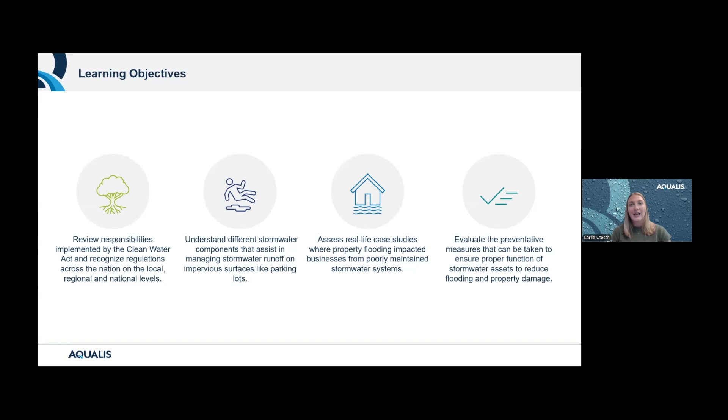So I have a few learning objectives for us today. We will review some responsibilities implemented by the Clean Water Act and recognize regulations across the nation on the local, regional, and national levels. We will understand the different stormwater components that assist in managing stormwater runoff. We will assess some case studies where poorly maintained stormwater systems ended up impacting businesses. And finally, we will evaluate preventative measures that can be taken to ensure proper function of stormwater assets that reduce flooding and property damage.

To get started, in our first section we'll talk about the foundation for the presentation, which is why stormwater management is so important. In this illustration, we have your average retail commercial parking lot. If you follow the yellow lines, that would be the natural flow of water. So as it rains, runoff drains across the lot into, thankfully, a storm grate.

We have a stormwater system on this property, and the catch basin is ultimately connected to a retention pond that then pushes out water to, let's say, this is a bay or a lake we have here. So the pesticides, sediment, oils, and trash all flow with the water.

They're going into the catch basin and then the pond, and the pond is meant to capture those. So the pond slowly deposits the stormwater into our lake here, which is why we need the pond to mitigate those pollutants and all the extra runoff within it.

So without the stormwater system, rain carries pollution into the lake directly. The water is moved across the impervious surfaces that we have within our urban development. So maintaining and managing stormwater runoff is an extreme concern because of the concentrated amount of impervious surfaces in all of our developed infrastructure. With more impervious surfaces, which are just surfaces that don't allow water to penetrate, that means larger amounts of runoff need to be either redirected or treated.

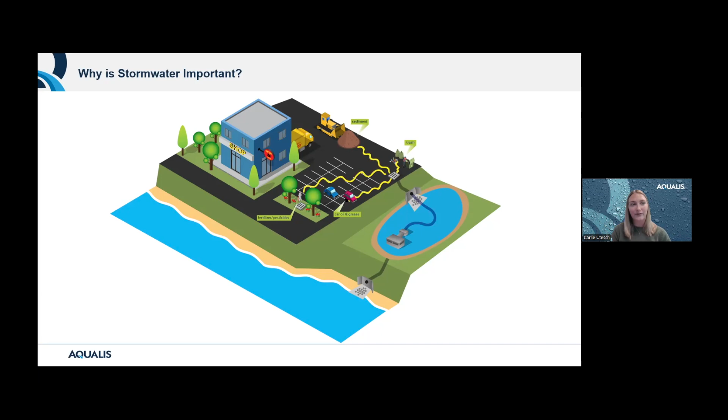So for our purposes today, I'm going to use these terms interchangeably: a best management practice, or BMP, and a stormwater control measure, or SCM.

These are treatment measures, techniques, or structural controls to assist in managing stormwater. They manage the quantity and quality of that runoff. Some are intended to do quantity more than quality, or vice versa. But ultimately, we often use these in tandem - multiple stormwater control measures on one site to manage that runoff. I'll refer to it as a treatment train in a couple slides as well. So we will also dive into what those assets are.

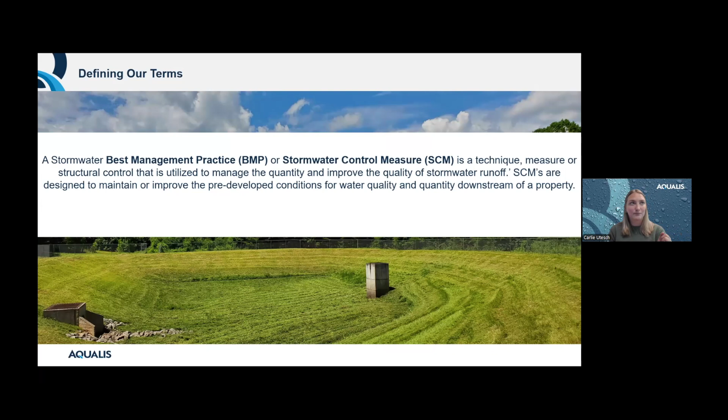We have bioretention or rain gardens, sand filters, constructed wetlands, wet or dry detention basins, retention and detention ponds, and grass swales. All of these systems work together, ultimately in a treatment train, following one to another all the way through to treat, maintain, and manage stormwater runoff.

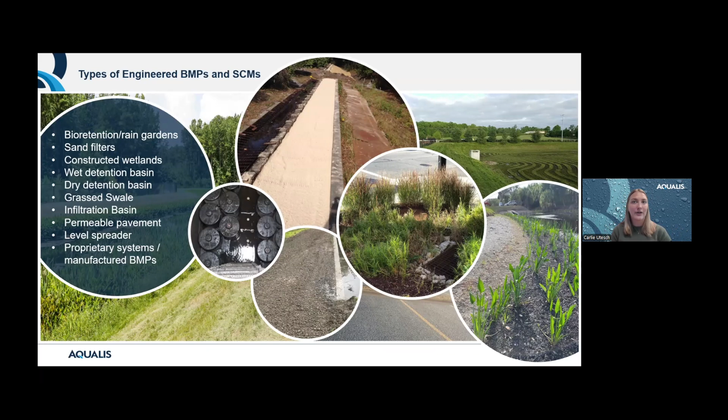So let's talk about the regulations in place. At the federal level, we have the EPA and the Clean Water Act. These regulations are overarching on the federal level, and beneath that we have the state and local regulations.

The National Pollutant Discharge Elimination System, or NPDES permit. I had a colleague call it a NPDES permit, and I thought that was really fun. You may be familiar with that. And then also an MS4 permit, or the municipal separate storm sewer system permit.

These regulations work together to implement local stormwater programs and ultimately compel local property owners and facility managers to maintain properly functioning stormwater systems. State and local regulations vary widely across the country, but these variations in local compliance are important and relevant to the area they are implemented in. A lot of multi-site property owners have some difficulty managing stormwater, but it's important to do so anyway.

Now that we've talked about the regulations, let's talk about how stormwater control measures can help property owners comply with them. Stormwater control measures are designed to control water quality as well as water quantity of post-construction stormwater runoff. That is primarily what I'll be talking about today, not necessarily during active construction. But there are regulations that stormwater control measures are implemented to comply with.

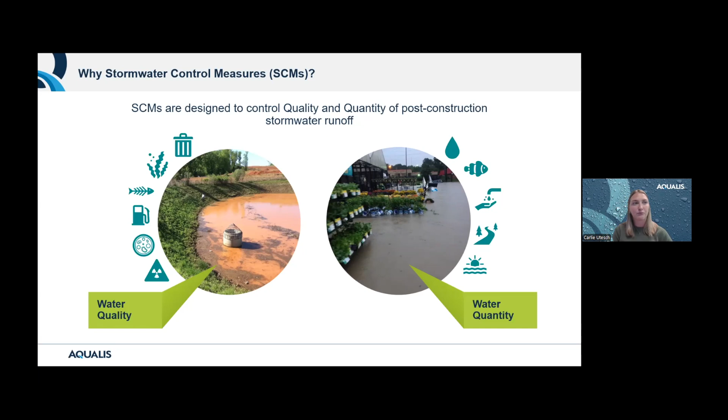Going into more detail about the importance of water quality, in many areas across the country, stormwater flows directly into lakes and streams without treatment, meaning anything it collects along the way could end up in our waters.

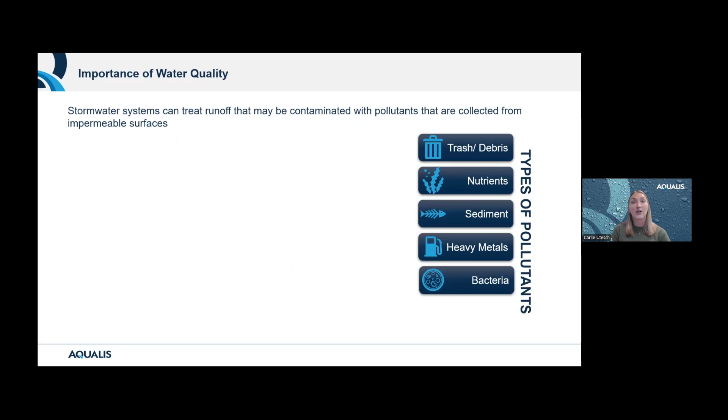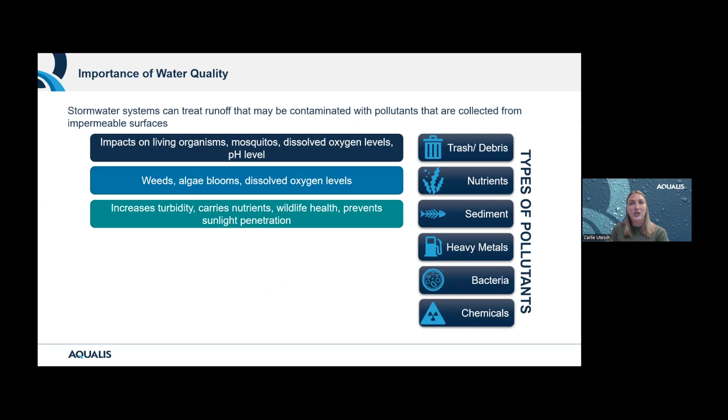Here are some common pollutants. Many of these harm our natural ecosystem either by blocking sunlight, impacting dissolved oxygen levels, introducing toxins, or changing the pH. These pollutants can be found everywhere in our daily lives, from trash on the side of the road, pesticides or fertilizers, unstabilized dirt, leaking gas tanks, animal waste, sewage, or paints and detergents.

Untreated runoff will collect all of these. So stormwater control measures are put in place to stop pollutants before they reach streams. We actually had an instance where a detention pond was very white, which of course is not normal. Upon further investigation, there was painting occurring across the street, and then it rained and the paint was pushed into the pond. So while that's alarming and something to keep an eye on, that's the point of the pond, right? It's to collect that paint before it goes somewhere else. So it's definitely something to be very aware of.

Oops, sorry, I forgot this last bullet point, the toxic chemicals.

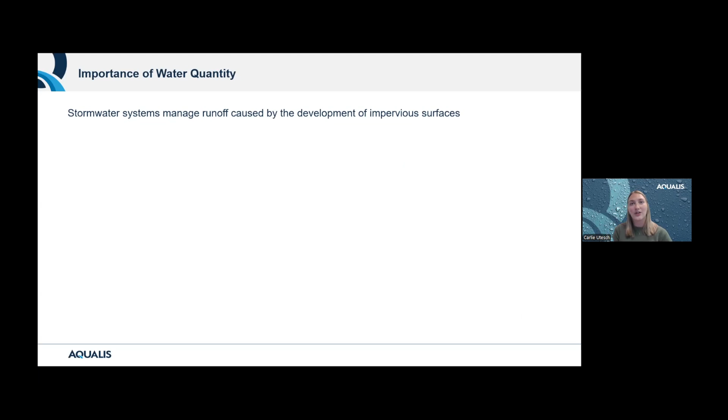Okay, moving on, let's talk about water quantity. Today, this is our main focus. When we think of water quantity, we think of flooding, but there's more than just flooding. The impacts really do span much greater than that. Flood prevention is our main objective for today.

Stormwater assets help mitigate flooding in parking lots, private and public property, including roadways. This flooding impacts the quality of water as well as the quantity, as we just mentioned. When systems flood, they don't function as designed, increasing the risk of contaminated water as the system isn't flowing, filtering, or treating the water properly.

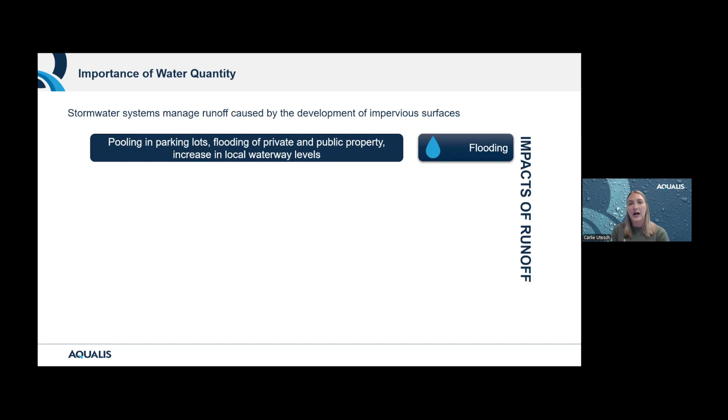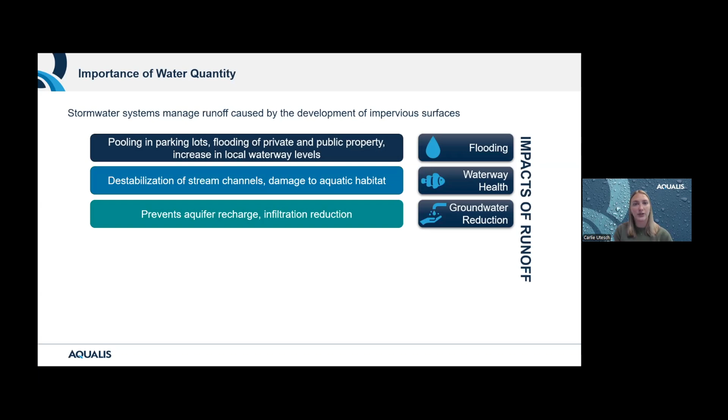Also, waterway health: flooding impacts waterway health with the destabilization of stream channels that ultimately damages aquatic habitats. Groundwater reduction: large amounts of runoff prevent groundwater recharge, which is the natural infiltration of water into the soil. This recharge assists by slowly moving water into the water table, which naturally removes pollutants. That's important as well. Erosion, soil destabilization, which can lead to major public safety issues and also impact stream banks.

Sewer overflows. This is a common occurrence during flooding when backup pumps or systems fail to handle the amount of water, which will lead to untreated wastewater reaching local rivers and lakes that can make people and organisms sick. So all of these impacts can be mitigated with proper stormwater management.

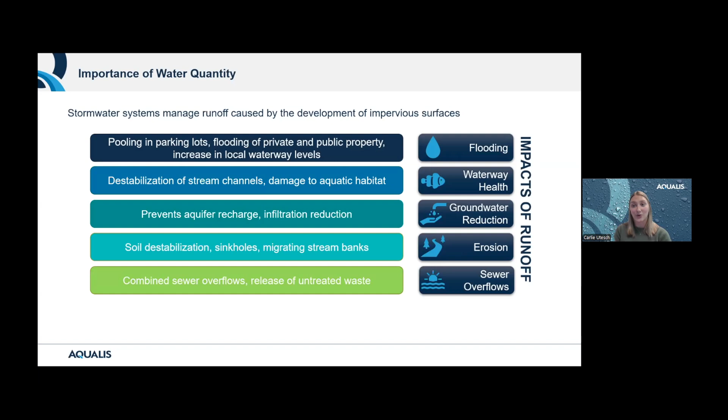All right, we've established the why when it comes to managing stormwater, but what are the responsibilities of property owners or those that assist owners with managing properties? So there are two major facets about property owner responsibilities we'll talk about today. Inspections on one side, and then the other is the operation and maintenance agreements, operation and maintenance plans.

So inspections, this can include a notice of termination or pre-occupancy inspection. That's really on the pre-construction side. So they take place during construction of a property before the operation of the site, before the ownership is transferred. So any maintenance or repair needs are documented for the general contractor to perform before the property owner becomes responsible.

Moving on, annual inspections ensure that a stormwater system continues to function as designed and is in compliance with federal, state, and local regulations. So every facet of the system is inspected and examined, and then an action plan can be developed for any system that has been improperly maintained or requires some restorative repairs. So an annual inspection, the report is typically submitted to your local municipality. It may require certification by a stormwater professional or a professional engineer.

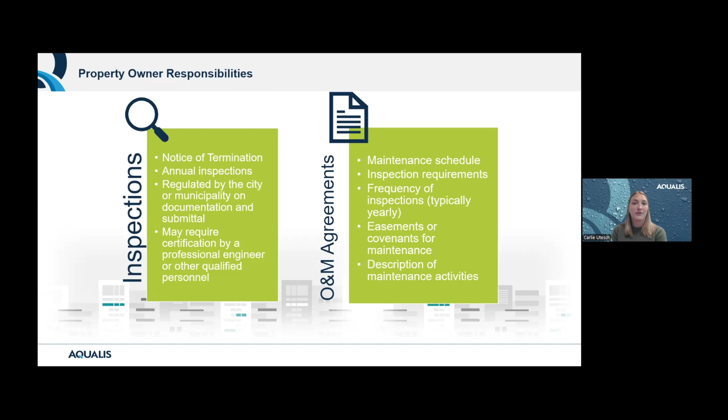And if not, AQUALIS is here to assist in implementing the document as well as creating one in the first place, establishing that maintenance plan that works best for the site, keeping in mind the budget and the system needs. So if your property is not maintained or inspected, you can be at risk of being issued a notice of violation. So what is a notice of violation?

It's an official notification to inform a non-compliant property owner or manager of a violation in relation to improper stormwater management. So when regulations or the operation and maintenance agreements are not followed, the notice of violation, which is called different things in different places, sometimes corrective action, corrective notice, is issued to the property owner. So this document includes where the issue was found and also ideally how to fix it.

But more than just the fine behind this violation, the importance is protecting the watershed, right? So regulatory bodies don't ever issue fines just to issue fines. There's always a reason. There's always some environmental expectations that are the root behind the violation.

So it's really important to communicate with the municipality if you're issued one of these, and most often they're very agreeable people. I know a lot of you are on the call today, and AQUALIS is here to work with the municipalities as well as property owners, really facilitating that relationship and making sure that our environment is protected in the end. So those regulations are really in place to ensure your system is working correctly, meaning it's capturing pollutants and reducing excess runoff.

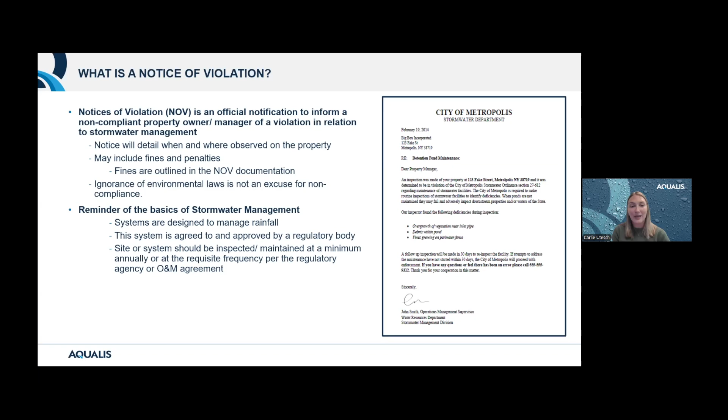So there's two different types, the during construction and after construction. Quickly going over during construction, there's a couple different factors and instances that may warrant a violation. The standards for construction practices are very different because there's a high risk of pollution with unstabilized dirt and other potential vulnerabilities. So potentially if the developer fails to apply for a proper permit or doesn't implement a stormwater pollution prevention plan, or potentially there's an exceedance of permit effluent limits. So those are all ways that you may be issued one.

But then after construction or post-construction violations can also be issued for similar reasons. So failure to implement an appropriate stormwater control measure, failure to maintain or repair those stormwater control measures are also a very frequent reason we see, especially when your operation and maintenance agreement outlines the expectations and then those aren't followed. That's a big deal.

Anytime water is pooling or flooding on the property, that's another red flag for many inspectors. So there are a few easy ways to identify that a system hasn't been maintained, but the inspections are in place to ensure that the system is properly maintained. Some other reasons could be illegal dumping, discharge and illicit connections.

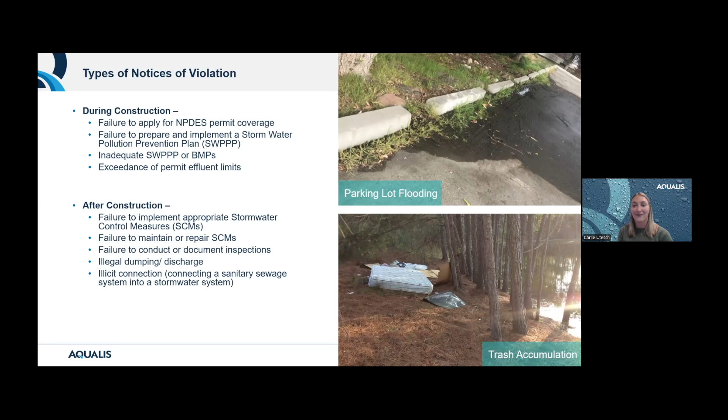But let's move on. Now that we understand the responsibilities, let's talk about how we can avoid those notice of violations. Specifically, how can we mitigate flooding utilizing stormwater control measures, what preventative maintenance protocols should be applied, and what deficiencies can end up causing flooding. So we'll review a few common stormwater control measures you may find on any given property or parking lot, why they fail, and how to avoid that.

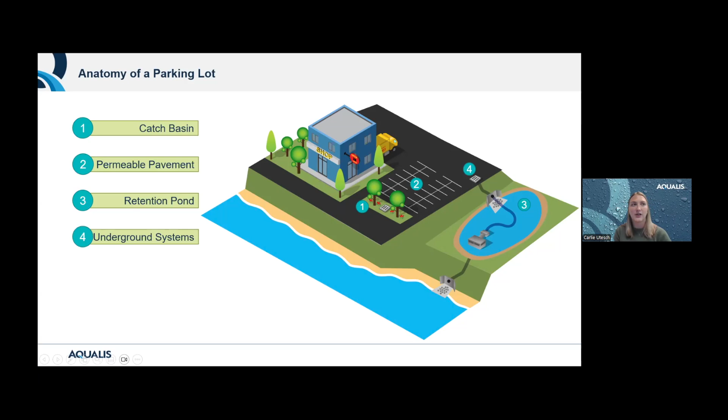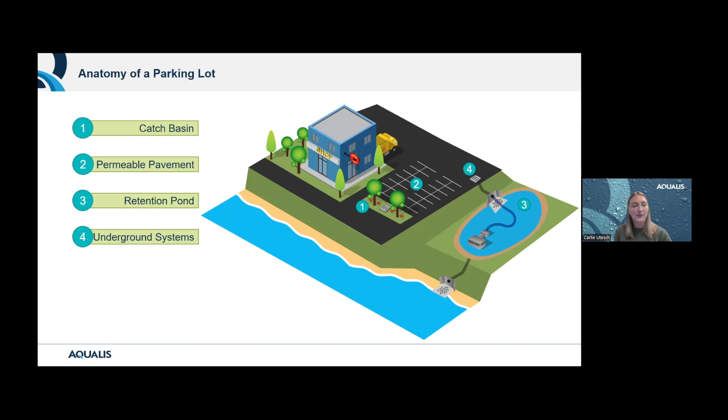But then also let's talk about underground systems. So these can vary. Some may just be a large vault as an alternative to a retention pond, but some also offer water quality benefits. So all of these systems work in harmony together to ensure proper mitigation of stormwater quantity and, of course, water quality. There are, of course, multiple other ones, but this is just what we have time for today.

So let's talk about catch basins. You may also call them storm drains. They are a common stormwater asset designed to collect the runoff from non-permeable surfaces. So that's, again, just any surface water cannot flow through. Catch basins are a very effective stormwater solution. They come in multiple designs, including drop inlets. That's the second photo from the bottom left, or a curb inlet, which is the middle photo. Catch basin is the second photo from the right. These systems take the flow of water underground through pipes and eventually to a pond or water body.

Naturally, sediment and debris settle in the bottom of the catch basin, which eventually can, of course, cause backups and flooding as the drainage capacity is reduced. So that's something to absolutely be aware of. Catch basins are usually found in parking lots and roadways. Normal wear and tear is expected because they are in the activity of it all. Large trucks and vehicles are also usually driving over them, or maybe even parking on them, which can cause them to settle and sink, like you see in the second picture.

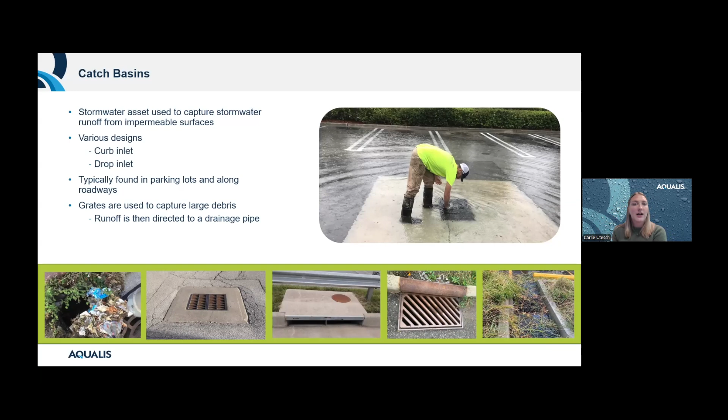In this picture specifically, you can also see cracks around the area, the two different squares around the drain. So that is a previous repair. So as you're kind of moving through, definitely something to be aware of. Those excessive loads will absolutely cause settling. But let's talk about some other common deficiencies. So, like I said, settling, that's essentially the brick and mortar deterioration. So inside or around the mortar of the basin is concrete, sometimes it's bricks. Those will eventually fail, which of course will release some debris downstream, but also leave an opening for stormwater to bypass through the grate, which unfortunately will lead to sinkholes as well.

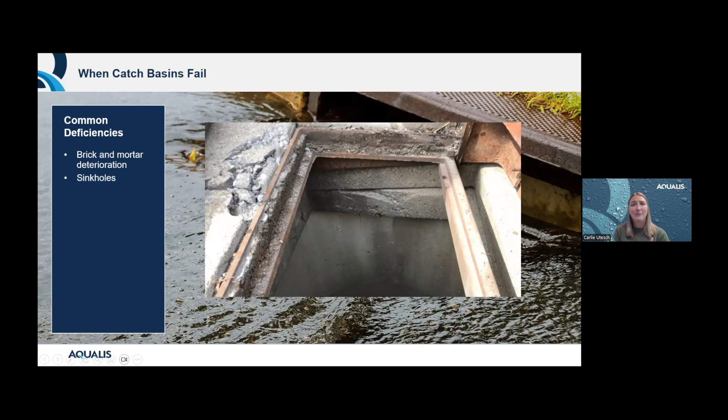Sediment buildup: as we talked about earlier, sediment collects in the bottom of the catch basin. So debris like leaves, trash, gravel, mulch, that will all collect in there and then eventually build up. That will lead to blockages and backups. Ground separation and cracking around the catch basin is a visual symptom that you can see from above ground, but it's always indicative of something larger happening underground as well.

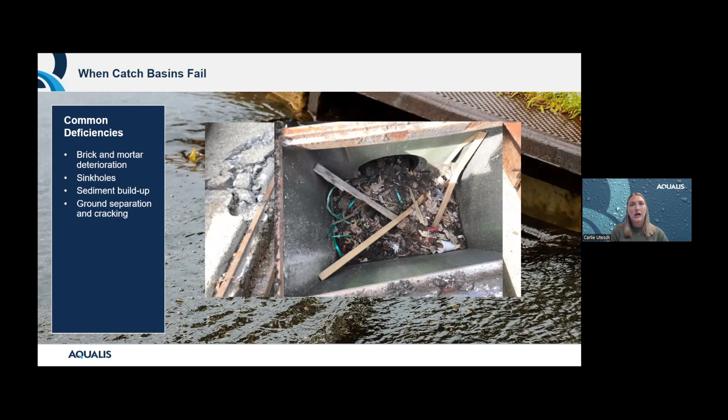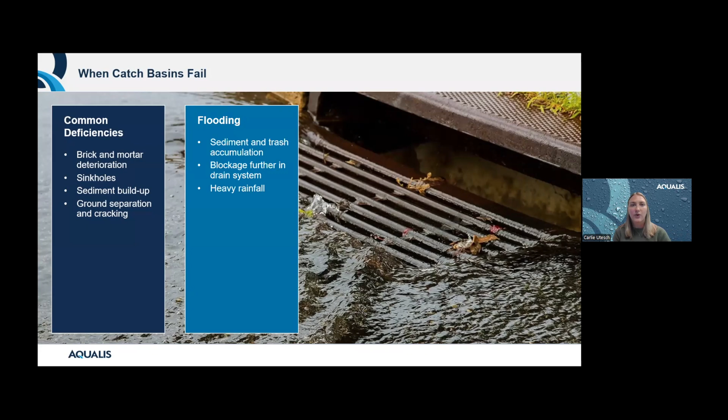Moving on to flooding, there's really nothing worse than flooding caused by trash accumulation, because that is the first step when dealing with catch basins. So thinking back to our illustration, if there's a blockage, crack, or issue with the underground pipe, that water could flood back up the catch basin, which we don't want. Heavy rainfall, so simply an overwhelming amount of rain, will cause pooling, but if water's not drawn down quickly enough, that's when you have an issue.

Okay, so how do we prevent all of this? With regular maintenance, of course. Simple visual inspections are a good place to start. Just identifying pooling or ground separation when it's minimal can save you thousands of dollars in repair if a sinkhole opens up or your building floods. So during stormwater inspections and maintenance visits, the stormwater professional will be opening the grate to clear out debris, but also taking inventory of the structure to identify potential failures before they lead to those sinkholes.

Professional stormwater inspection will also include sediment measurement, so understanding how much debris is built up. For example, once sediment accumulates more than a couple inches, depending on your property, it may be time to clear that out. Same with trash and debris. So the whole point of the catch basin is to catch this before it flows downstream. So it's good that it's accumulating, but also you can't let it build up.

So a professional preventative maintenance visit is also going to include documentation. That way there's a paper trail of maintaining the asset, and your municipality can have proof that you've been taking care of your site, especially in cases where you may not have the budget to fix something immediately. Documenting the issue can show that you've been putting in the work and you understand the priority of the repair.

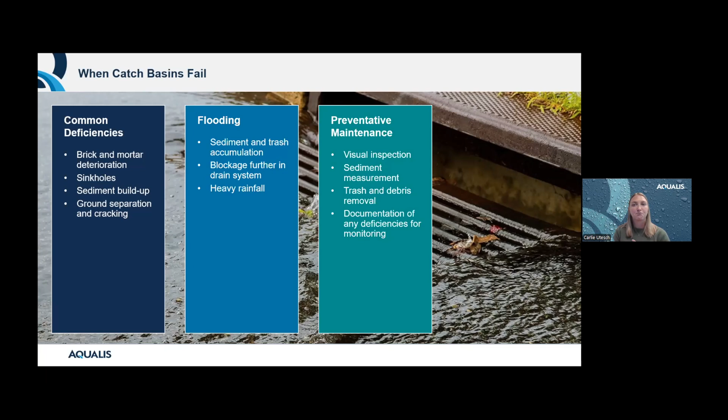Okay, and corrective maintenance. In the event that something small becomes larger, now it's on that corrective or restorative level. The corrective maintenance is probably going to require some specialized equipment, but it's intended to stop whatever deterioration is happening. So an example of that specialized equipment is an industrial vacuum truck. The truck is essentially just a large vacuum. So it's vacuuming out all the debris and sludge inside underground assets, a catch basin in this example. The debris is then stored in an internal tank and disposed of later.

A lot of these trucks also have jetting capabilities, which is essentially a power washer. It's a high pressure water hose that will scrape the sides and make sure all the gunk is collected as well. Additionally, underground CCTV pipe inspection: that's a small robotic camera that we'll send inside of a pipe to detect any further damages, clogs, and the ultimate root cause of whatever issue is happening above ground. So if you're having frequent flooding, you can diagnose the problem with something like CCTV instead of just putting a Band-Aid on the issue.

Extensive trash removal, that's when the system has been neglected over time. On a large scale, you may have an extensive clean out that would be necessary to fully repair the structure. Rehabilitation or restorative repairs can also happen, with full replacement eventually.

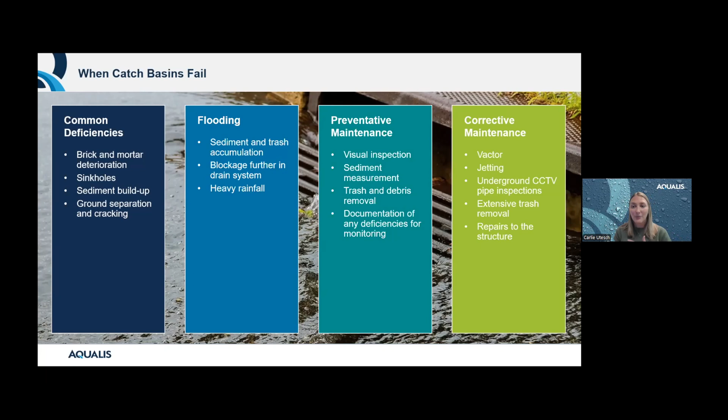Small repairs will help extend the life, but ultimately rehabilitations will absolutely happen.

Moving on, we have permeable pavement. This is a stormwater control measure that consists of paved surfaces that reduce runoff with infiltration. The great thing about permeable pavers is you're not sacrificing space. It can still be used the same way as traditional pavement. There are many variations as well. You can include aggregate materials or the pavers themselves, so not only does this asset assist in water quantity, but also with water quality. Typical options include porous asphalt, pervious concrete, interlocking pavers, or even plastic grid pavers.

We'll explore a case study later that includes some pavers and flooding. But these assets provide quality and quantity treatment—they're removing pollutants and also assisting with the amount of water. With so many variations of permeable pavement, it's really important to follow the manufacturer's guidelines for preventative maintenance, and corrective maintenance will likely as well be necessary to ensure the longevity of the system.

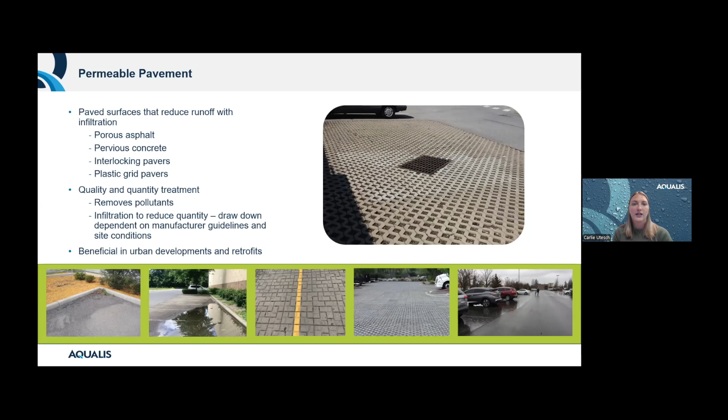This asset is really beneficial in urban development and retrofits, especially is where we see it as well. Where surface area is lacking, it's really a great solution for existing parking lots when maintained properly, and it also assists in mitigating flooding.

In this picture here, we have permeable pavement in the spots where the parking spots are. The centerpiece is just your normal asphalt, but I think this is a really great picture to show how it works.

In the areas where the parking spots are, it looks fairly dry, and that's because the water is immediately infiltrating. But in the center, it's starting to pool a little bit, and you can really see the difference in how that water behaves. Also, kind of in the middle of the picture, you can see some rocks along the curb, so the water is being funneled. If it's not caught within the pavement, it's funneled into what is likely a swale back there. This shows you that the pavement is working correctly—water is collected as it's landing.

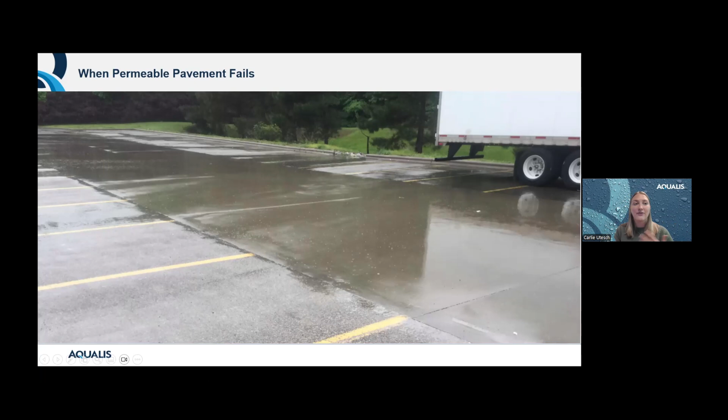But of course, that's not what we're talking about today. We're talking about the failures—so common deficiencies with permeable pavement.

The aggregate material—especially when there's pavers, there's some material in between those pavers called aggregate material—can sometimes clog when sediment settles into it. Eventually it'll build up a crust that will lead to flooding, because then your permeable pavement is crusted and it's acting like normal impervious pavement. So that will lead to some flooding as well.

Plow or vehicle damages are fairly common as well, especially when it comes to snow plows—got to be careful with those, not scratching the surface. Anti-icing pre-treatments like salt and sand are also not really friends with permeable pavement because it will lead to that clogging again.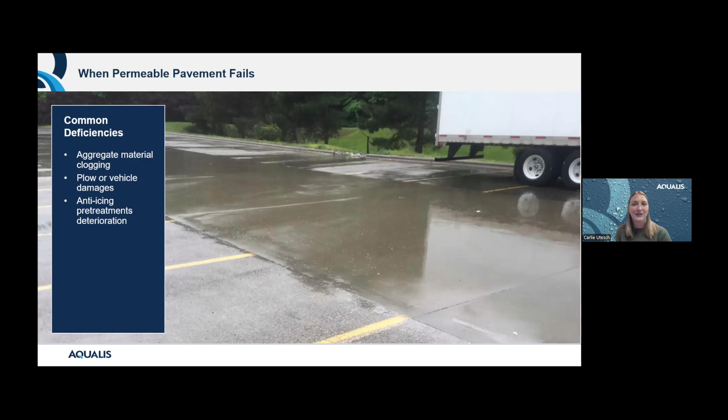So flooding, of course—sediment accumulation is always what we're talking about. It comes from sand, rocks, settling into the joints, or, this is kind of like a sponge in this material, so filling up the holes in that sponge. It's also when the pavers are clogged—they're no longer permeable, so they're behaving like normal asphalt.

We talked about sanding a little bit. Permeable pavement is not designed to treat stormwater as an overflow from other assets—it's designed to treat stormwater where it lands. So that's absolutely something to be aware of as well.

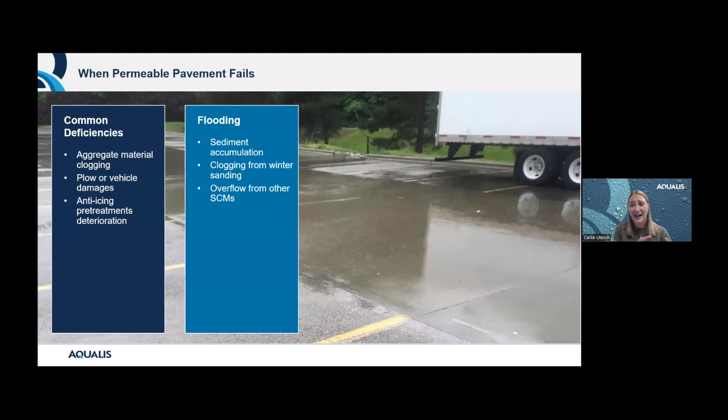We've talked about the treatment train a couple times. The whole point is that these assets are working together. Permeable pavement is not going to solve your flooding problems by itself, or heavy rainfall issues, on its own.

I have a picture here I wanted to share with you guys. This is actually from Bill Hunt at North Carolina State University—an example of how they're testing the health of the system. This is a drawdown measurement: they've caulked in some 2x4s and poured some water in the center just to measure how long it's taking to filter that water. This is a great way to kind of be on top of how the asset is really draining, or the drawdown time of it.

So that's an example of preventative maintenance. Another example is the visual inspection. If you think about the picture on the back there, there's always some trees near pavement as well, and those trees are going to drop nuts and leaves and things like that. Once that starts to accumulate, it's also really good to be aware of that, because again it's the same issue in a different form—it's clogging those pavements as well as things break down.

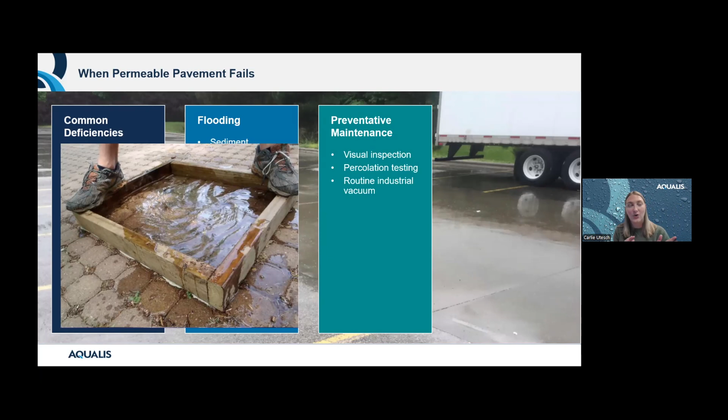You can also vacuum or street sweep permeable pavement. Other preventative maintenance may include spot aggregate material replacement—that's in the event you have pavers and the gravel between them is starting to disappear. You'll want to occasionally repair that. As always, maintenance documentation and record keeping is an essential part of preventative maintenance as well.

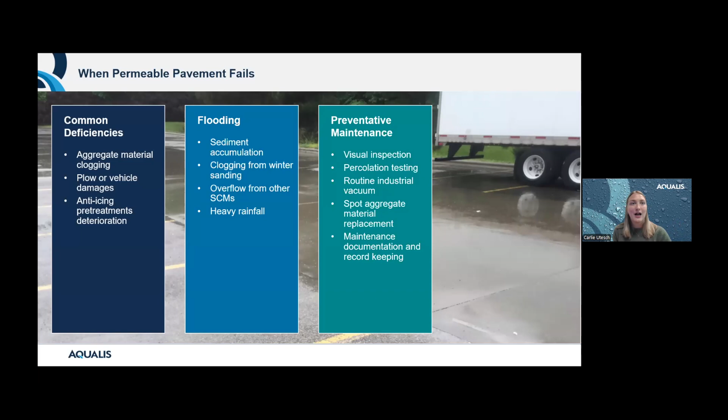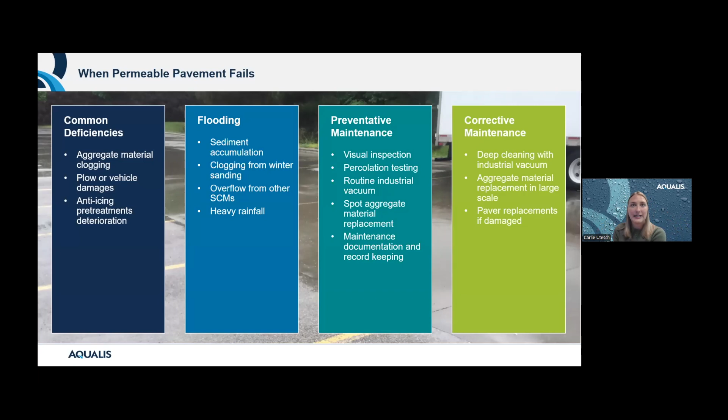And then we talk about corrective maintenance. It's just the extreme version of preventative, right? So deep cleaning the system, maybe replacing that material on a large scale, and also replacing individual pavers or sections of pavers as needed. Okay, let's talk about retention and detention ponds.

This is another type of stormwater control measure. Retention ponds specifically are designed to hold water permanently, whereas detention ponds are usually only holding water for about 72 hours. So absolutely something to be aware of if this asset is on your property.

Stormwater ponds are designed to store stormwater during high water events, which increases the overall flood storage of your property as that rainwater is maintained long enough to reduce the peak flow downstream until things calm down. Water is diverted to a wet detention pond by a network of underground pipes connecting stormwater drains to the pond. The pond's natural processes then work together to remove pollutants, so the system allows large amounts of water to enter, and the outlet then empties controlled amounts of runoff downstream into the watershed. Through our maintenance programs, AQUALIS monitors and provides inspections to alert property owners of any deficiencies related to ponds.

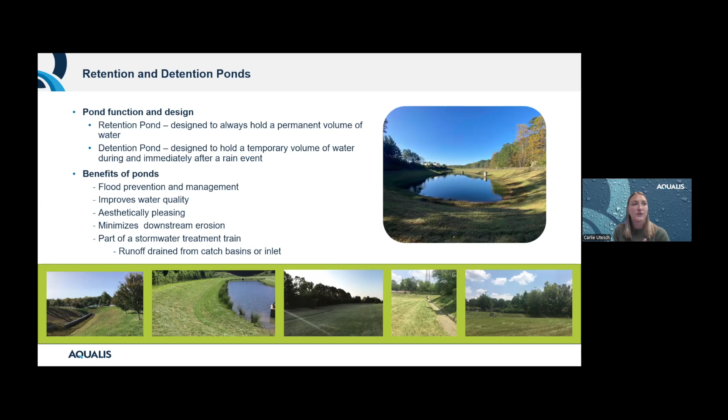Talking about deficiencies is my segue. Common deficiencies found in stormwater ponds include vegetation overgrowth—a very common sign of neglect. Excessive overgrowth hinders the pond from proper function, and mature root systems can impact the slope. Vegetation may also encourage negative species like mosquitoes that make the area unsafe, especially as sight lines are impacted—that's a common note we see with violations. Similarly, nuisance vegetation can take over, impacting the natural infiltration and pollutant removal processes of a pond.

Sinkholes are actually common with ponds as well, especially related to underground piping that leads to the pond. Thinking back to our parking lot diagram, the catch basin had a pipe that goes into the pond—those sometimes fail as well. And of course, sinkholes are extremely dangerous, so definitely something to be aware of.

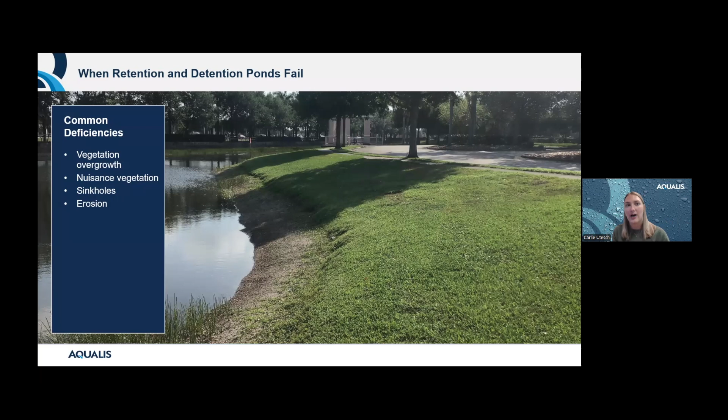Another important function of stormwater ponds is to capture and trap sediment and debris, like we talked about earlier. When that sediment builds up, it's time to remove it as well. So definitely be aware that the pond is collecting things, but eventually we need to pay attention to the pond and make sure it's operating at its full capacity.

Trash accumulation—sometimes ponds include trash racks to further decrease accumulation downstream, but make sure you're collecting that trash at the inlet or near the outlet to decrease the amount of trash that will ultimately clog or reach local waterways. Definitely important to be aware of that to prevent local flooding.

Similarly, debris or clogs in the outlet structure—trash, sediment, and debris are all contributing factors here with every asset. So failure to maintain structures, when ponds are neglected, water level will rise past design levels, which can then result in a notice of violation and flooding.

Also, collapsed pipes. Underground structures feed into ponds—if they collapse, backups are going to occur, likely in the pond and then all the way back up your treatment train, like we talked about, whether it's the catch basin or potentially into the business as well.

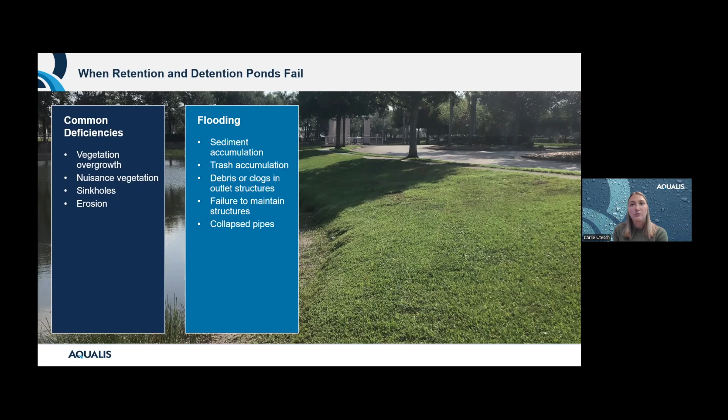Heavy rainfall—this is when the drawdown is not occurring at the rate it's supposed to. Definitely important to be aware of that.

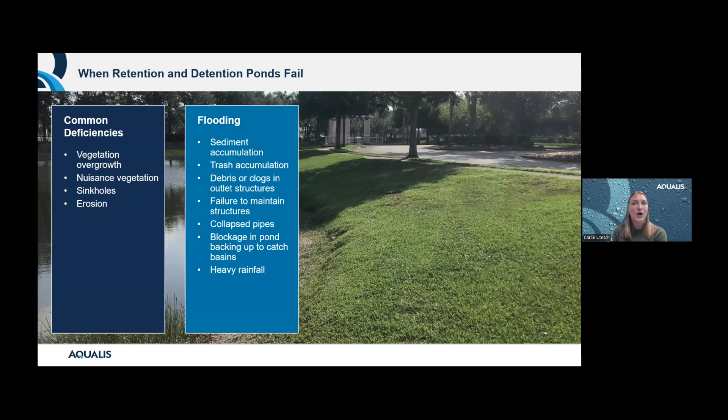Moving on to preventative maintenance. Vegetation is a big one. Routine mowing, trimming, and removal of nuisance vegetation is very important here.

Monitoring sediment at the forebay or basin, removing that trash and debris. Monitoring water levels, so after rainstorms, for making sure there's proper drainage.

Make sure you're assessing animal activity. Beavers really love to make homes in these ponds. They create dams, which will potentially cause flooding and backups. So being aware of that and making sure beavers are not preventing the function of the original design.

Corrective maintenance is again the extreme version of preventative maintenance. So excessive vegetation removal, slope stability to reduce or repair erosion, clogged or damaged pipes. Sometimes extensive repairs, major excavation is needed.

Or CCTV underground inspections, just making sure that we are using cost-efficient ways to find the root causes, but ultimately treating the issue at the source.

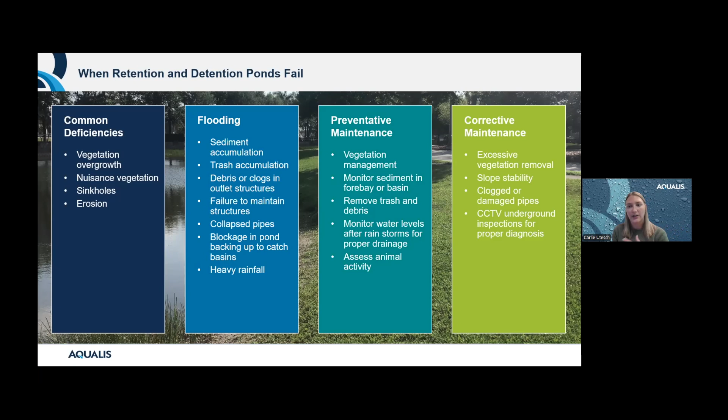It's not listed on here, but dredging as well. So kind of what we talked about earlier, sediment will accumulate, just being aware of how much sediment is accumulating.

Next asset we will talk about is underground systems. Especially engineered underground systems, they're going to offer flood control, reduce erosion, and also improve water quality. This solution can move water slowly to reintroduce it into the watershed. Large pipe systems help slow down and hold stormwater runoff, commonly paired with proprietary devices that treat water quality.

These underground assets assist in the removal of hydrocarbons, phosphorus, other heavy metals, especially when coupled with those filtration systems. So these are typically installed in parking lots, streets, or even open spaces.

Proprietary devices are used in conjunction with underground stormwater control measures or vaults in the form of filters, cartridges. These remove pollutants through different types of processes. Underground systems maximize the space below the ground to minimize the impacts above ground. They're commonly found in colder climates where a retention pond just doesn't make sense, potentially could even freeze.

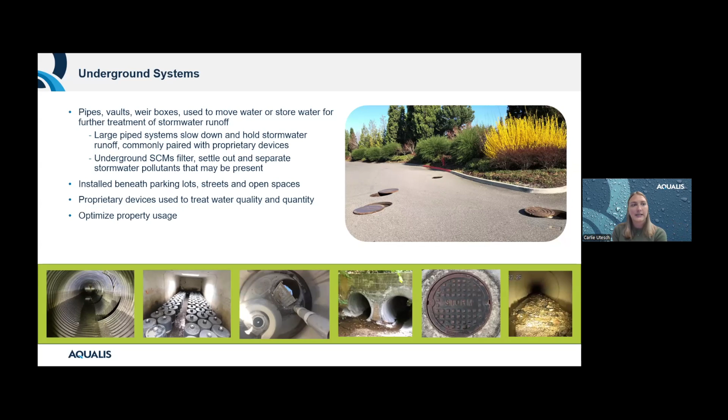Blown out slopes. This is more related to the velocity of water. The faster it's moving, the more harmful it's going to be. The angle of those pipes is very important because that fast moving water can be dangerous, especially in extreme rain events.

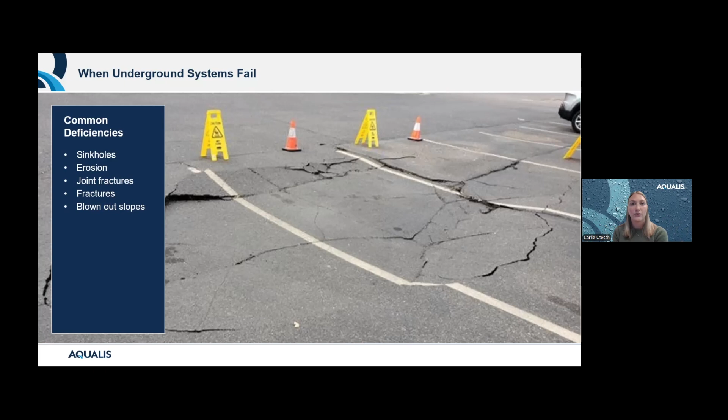Moving on to flooding. When we're looking at flooding, this goes back to improper maintenance. Failure to complete the annual inspections, clogged drains, debris, trash, and sediment all settle and clog these systems and then back up to catch basins onto your property, potentially impacting your business.

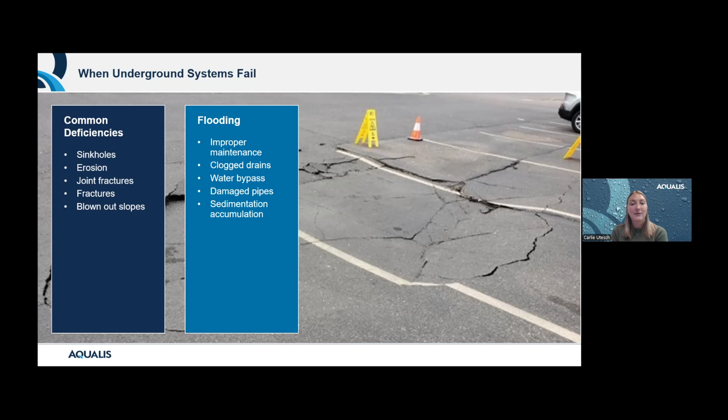Water bypass, when water detours from the design and floods your parking lot above ground. Damaged pipes, similar to the above, water's not reaching or moving through the intended path. Again, will lead to backup and flooding. Sediment accumulation, trash and debris blockages all, again, lead to flooding.

Preventative maintenance: what we can do to mitigate this flooding and these sinkholes. Continually measuring sediment inside the vault, just making sure that's not accumulating too much and the system is regularly cleaned out. Some visual inspections, but often if it's underground, you're not going to be able to see in there. You've got to have some confined space entry.

Making sure you're removing floatable trash and debris as well. Proprietary device inspection and cleaning often involves vactor or, like I said, confined space entry.

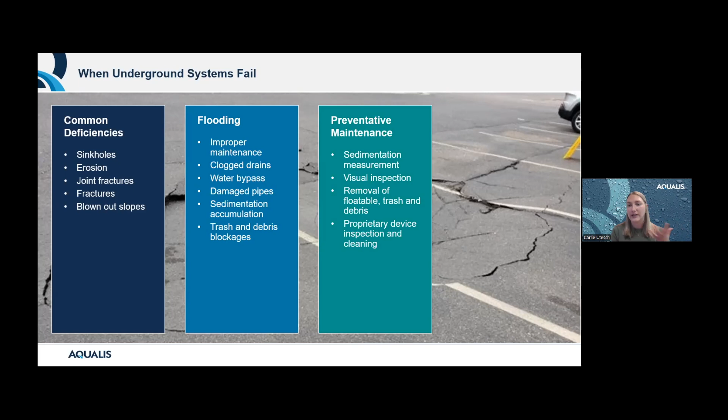Okay, corrective maintenance, same thing, guys, you're used to this at this point. Vactor, jetting, CCTV, underground pipe inspections, standard non-invasive options for cleaning underground, proprietary filter replacements. These can all vary in types and sizes and quantities. So working with a stormwater management team that understands the filters is really important.

Repairs and rehabilitations. Repairs to underground systems are usually costly and extensive. Like I said before, with the car analogy, eventually these systems will fail, but it's really important to continually maintain them so that we can prevent that for as long as possible.

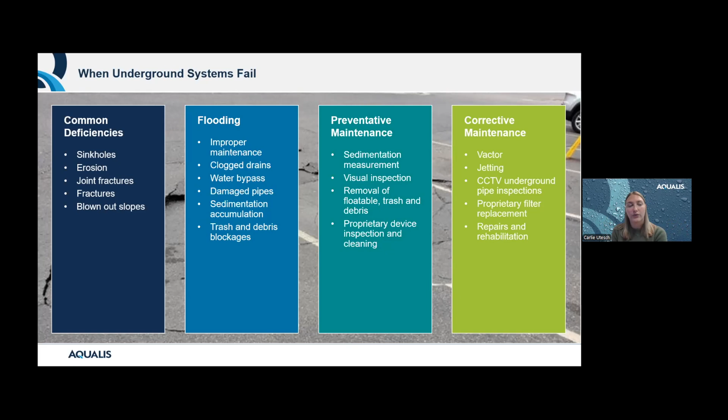Making sure this maintenance will help you be aware of the health of your system, especially that CCTV, so you can visually see what's going on in there, and making sure that you have the capacity to budget appropriately for future repairs and replacements.

Okay, so we've talked a little bit about this, but this is what we call the run-to-fail method, or kind of the set-it-and-forget-it approach. This is a lot of what we see, unfortunately, with property facility managers. Maybe the asset's hidden, or they just genuinely don't know what they're supposed to do, and then they don't do anything. Eventually something is failing, something's breaking, and now it's a severe issue. Maybe they got a violation. Now they're aware. But unfortunately, this lack of awareness of a stormwater system is the most common thing we're seeing.

So that's why we're doing things like this, and I'm so happy Stormwater Awareness Week has allowed us to present as well, because the education is so important. Making sure that property managers, property owners, and facility managers are all aware of what they have on their system.

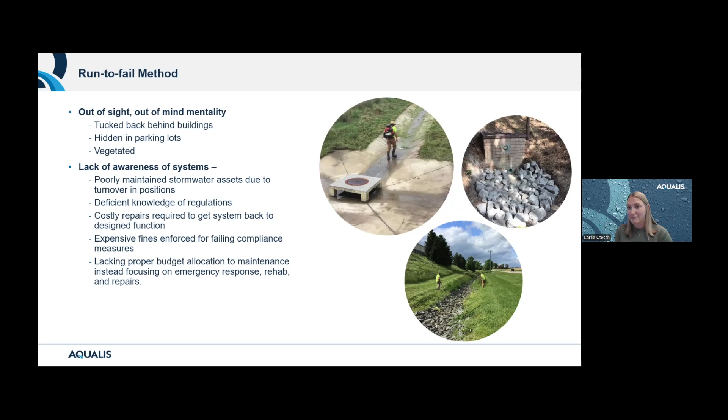So that they can avoid those fines, but also protect the environment. We often see that budgetary restrictions are a leading cause of failure, unfortunately. So we want to prevent that as much as possible, with awareness, but also by working with a professional like AQUALIS—we're here to help you plan and budget for future repairs. But ultimately, maintenance is the way to do that. Keeping up with your system, regularly inspecting it, making sure you're on top of the health of whatever assets you have on the property, is the best way to protect the environment and also avoid those fines.

The reinforced sod grid was visible through the parking areas. In this case, the sod grid is a type of permeable system used for parking as an alternative to asphalt or concrete. It also provides support and traction for vehicles to park and people to walk on. But the damaged sod grid was preventing water from flowing through the stormwater system, so the system was severely clogged—it's not acting like a pervious system anymore.

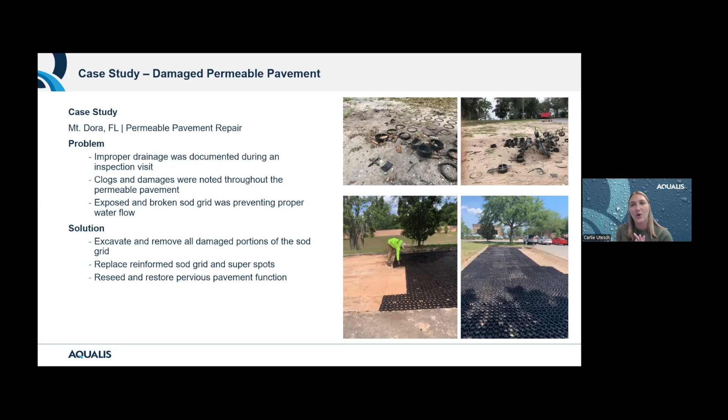This next one was a location in Texas experiencing frequent flooding. AQUALIS was engaged to assist the client in looking into the cause of this routine flooding. The store reported the area was always slow to drain after a rain event. AQUALIS came out and performed an investigation, and found that the nearby catch basins take on a ton of trash. During rain events, the trash and debris continually clogged the drain. In this specific instance, trash was flowing in from properties upstream.

So AQUALIS restored the original property to ensure the stormwater was treated and contained as needed. But the issue was still coming in—we can try to mitigate as much as possible on site, and we did that. But it's also really important to educate everyone in the community to make sure we're all on the same page. To mitigate excess sediment and trash, the team installed a silt fence to prevent large trash and debris from traveling across the property lines. But the root cause is larger than that, right? So it's important to be mindful of the consequences for your property and also your neighbors.

And again, we talked about this a little bit before, but when it comes to regulations, the whole point is to benefit the environment, right? It's not to just slap some money or a slap on the wrist—it's not about that. It's really about benefiting the community. So it's really important to spread education and inform others of how to be good stewards of stormwater management. Stormwater management is essential to prevent flooding.

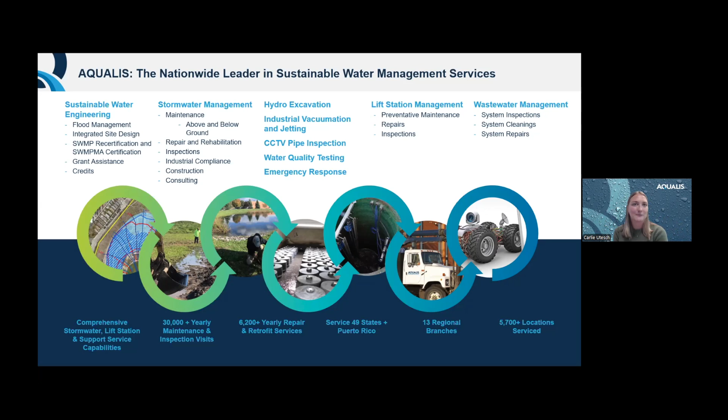Gabrielle, I wasn't monitoring the chat, I don't know if there was anything coming through. There was one towards the beginning: how exactly is sedimentation measured?

That definitely depends. The quick answer for measuring sediment is a ruler. It doesn't have to be complicated. It depends on where you're trying to measure it. In a catch basin, it's kind of visual, you can start to see when things are building up.

We also have another question here from Angela: when a property's underground drainage system is enclosed and piping is led to seep underground, what can be mitigated when flash flooding occurs? Besides everything you mentioned, I feel like it is a little difficult if there's no discharge happening except underground. So sorry, will you say the first part of that question again? Yes, when a property's underground drainage system is enclosed and piping is led to seep underground, what are some mitigation tools when flash flooding occurs?